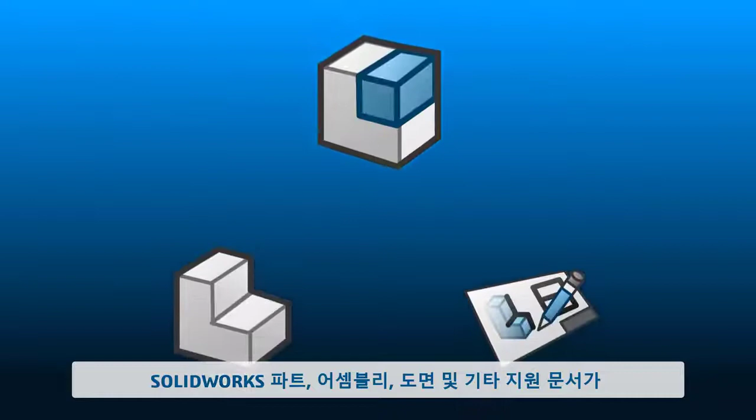Whether you work in a large organization or just a small team, no doubt you're concerned with storing, managing, and collaborating on your design data. And it's tricky, because SOLIDWORKS parts, assemblies, drawings, and other supporting documents are all linked. Consumer cloud storage apps don't know how to handle that. Maybe the investment in SOLIDWORKS PDM and Manage isn't right for you.

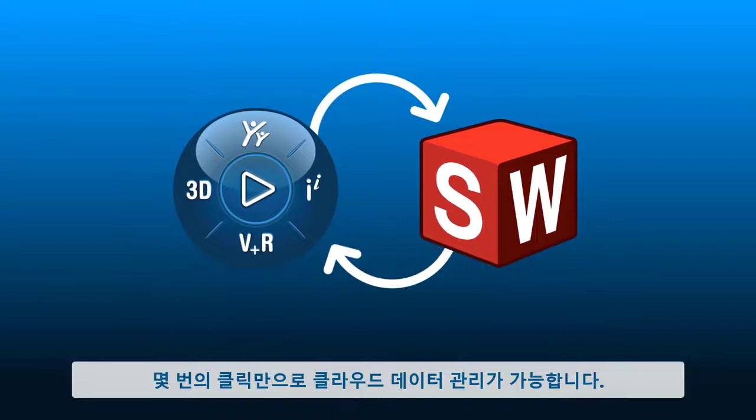There is another way. When you connect SOLIDWORKS to the 3D Experience platform, cloud data management is just a few clicks away. Eric Engineer and Debbie Designer are part of the team working on the Nemo submersible. They are on a tight deadline to finish up the hatch design.

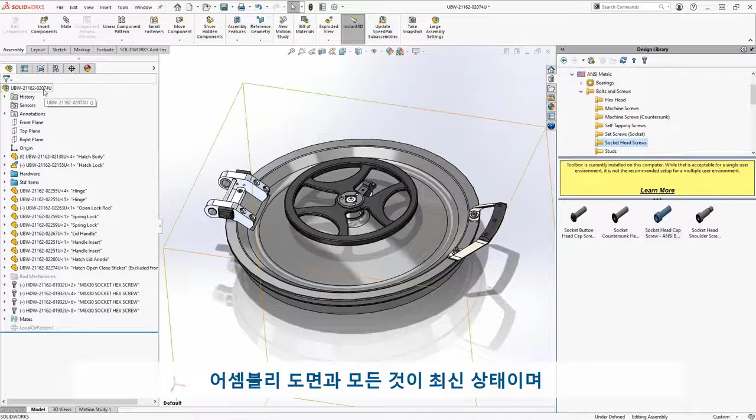Eric puts the finishing touches on the latch mount by inserting fasteners from SOLIDWORKS Toolbox. A quick check on the assembly drawing, and everything is up to date and ready to save to the cloud.

First, he logs into the 3D Experience platform, his team's secure connection to the cloud. Right from the task pane, he sees the status of his work. These indicators show which components need to be saved.

As for the hardware and other standard parts, SOLIDWORKS is configured to automatically catalog and release these items so all users can access their shared libraries online.

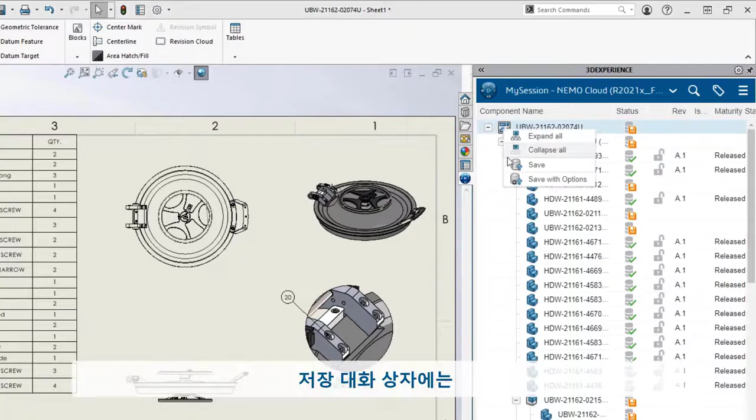The Save dialog shows exactly which items require an update. He can also assign any item to a bookmark, such as related drawing files. Out of a long list of components like this, bookmarks are a convenient way to flag them for easy access.

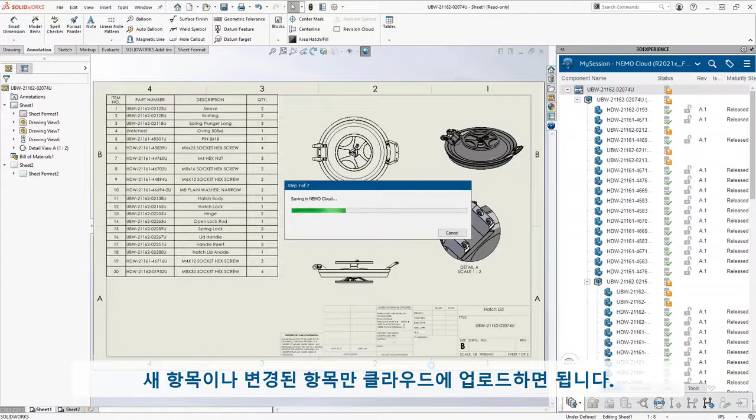Only the new or changed items need to be uploaded to the cloud. This makes efficient use of network bandwidth, but still ensures everything is up to date.

As the leader of his team, Eric is able to release his own designs. Easy-to-use lifecycle operations like this help the team avoid accidental overwrites.

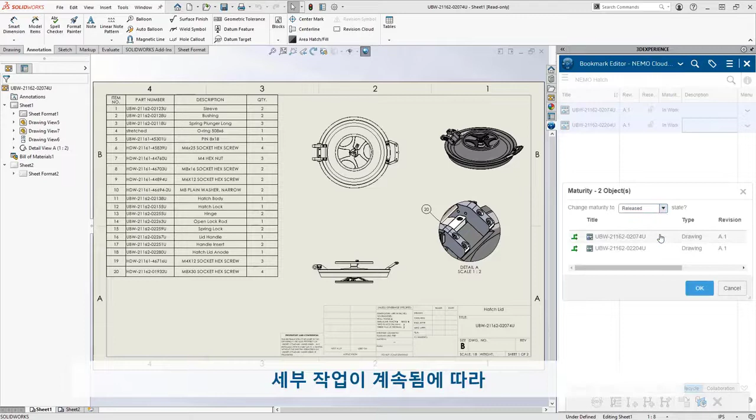Switching over to his Bookmarks tab, he sets the related part and assembly drawings to Released. It's just 2 drawings for now, but as the detailing work continues, the bookmark will keep everything organized for quick access.

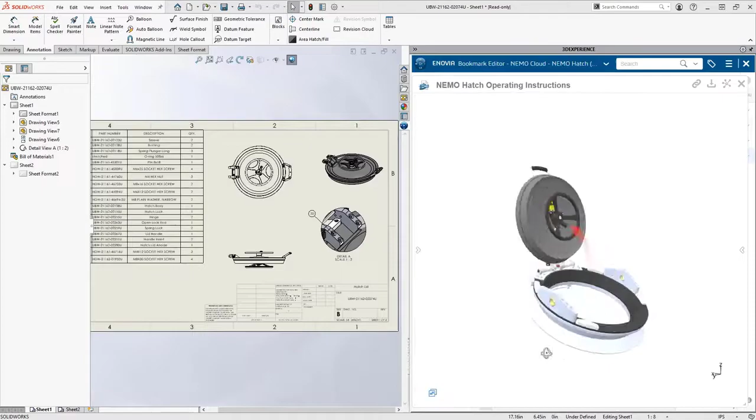Eric has a backlog of finished designs that also need uploaded to the cloud. He can automate this with a batch save. He just selects his local design folders and assigns them to the appropriate cloud space. SOLIDWORKS takes care of the rest.

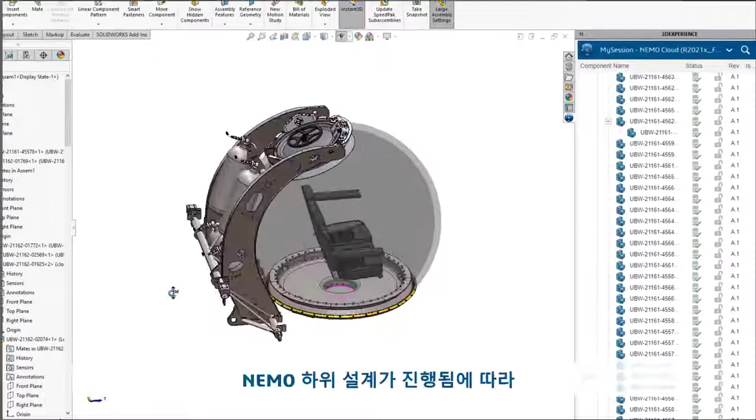As the Nemo sub-design evolves, the team must respond to change orders quickly. Debbie logs into her session and sees a message from Eric requesting a change. A quick keyword search shows several results. This one looks right.

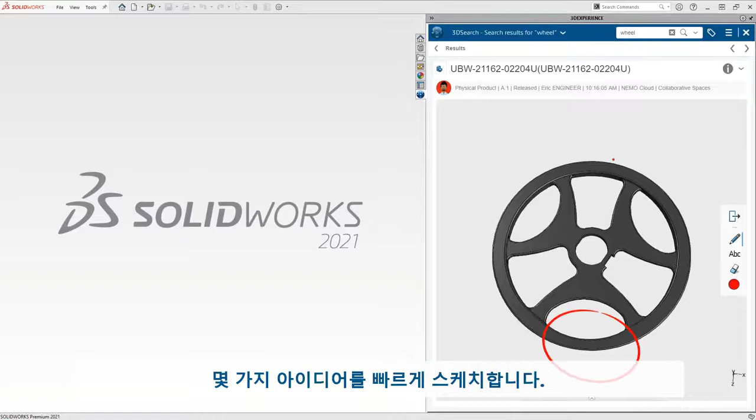Debbie uses the 3D annotation tools to quickly sketch out a couple ideas. From here, she opens the part in SOLIDWORKS. The latest version is automatically retrieved from the cloud.

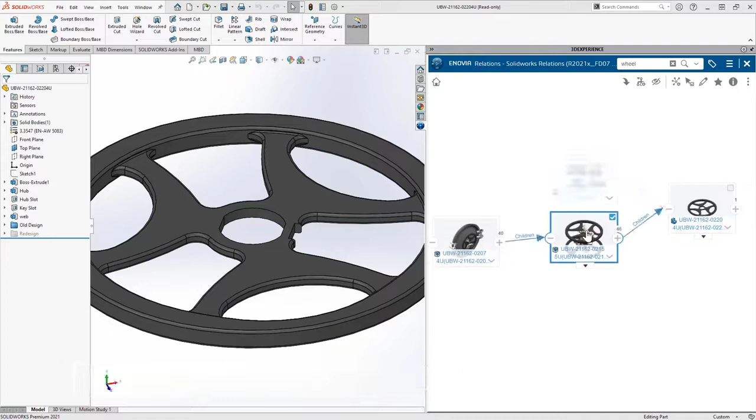Before she makes any changes, it's best to do a where-used search. The hand wheel is used in one subassembly below the master hatch assembly. She can open that right into her modeling session and get to work.

This version of the subassembly is released. In order to make changes, Debbie needs to create a revision of the assembly and the hand wheel. The status indicators immediately show that the current assembly structure is out of date.

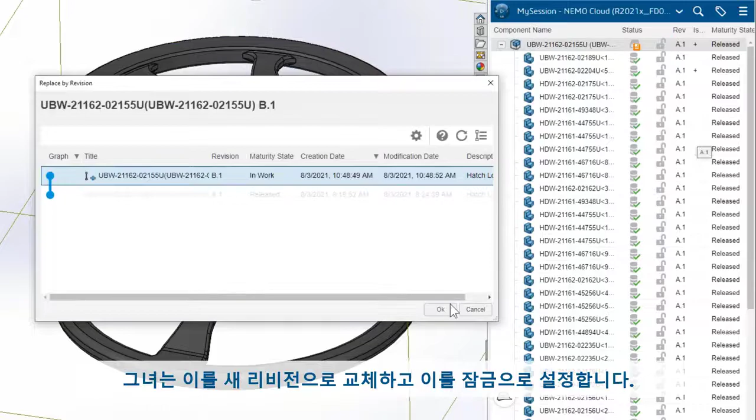So she replaces it with the new revisions and sets them to reserved. This gives her write access to the items she needs to modify without locking other users out of the rest of the assembly.

The redesigned hand wheel looks great, but she needs to update the drawing. The shared bookmarks give Debbie quick access to the related drawing files.

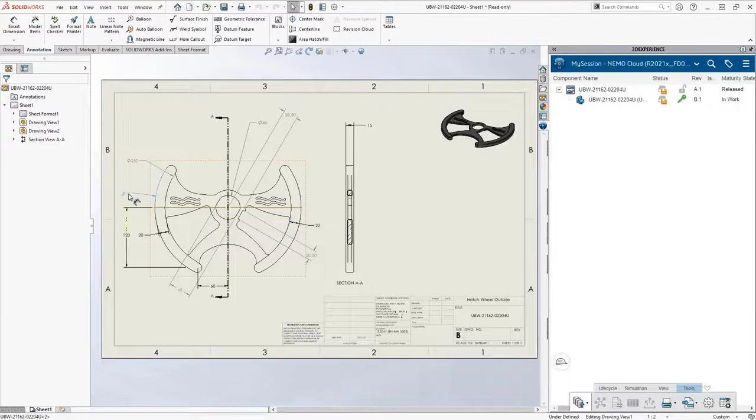The drawing is now in sync with the part model, so she saves it to Revision B, then sets the part and drawing to a frozen state so they can be reviewed.

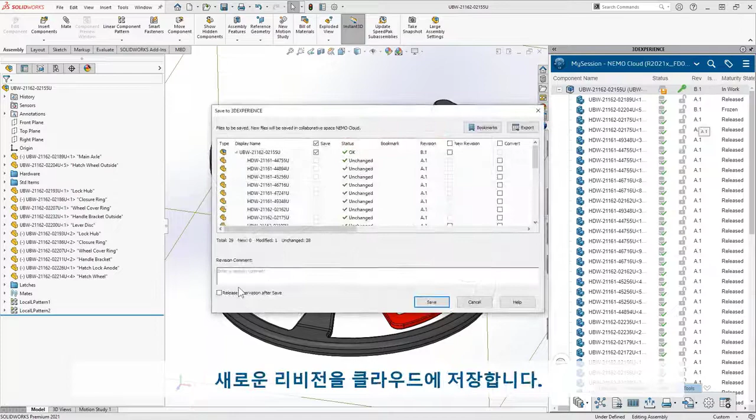Returning to the assembly, she finishes out the design by adding the latch mechanisms and saves the new revision back to the cloud.

In order to meet their tight deadline, the Nemo team often needs to work on the same design files at the same time. Eric is working on a new revision of the master hatch assembly.

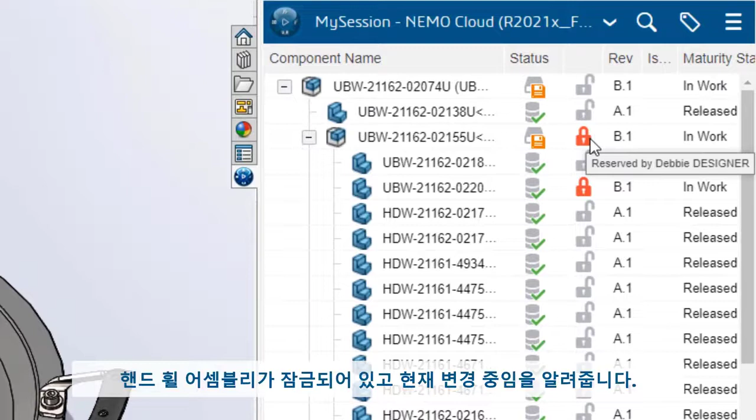These icons let him know Debbie has the hand wheel assembly reserved and is currently making changes. He can reserve the top-level assembly without affecting Debbie's work on the subassembly. This modular approach to access control allows users to design concurrently without accidentally saving over each other's progress.

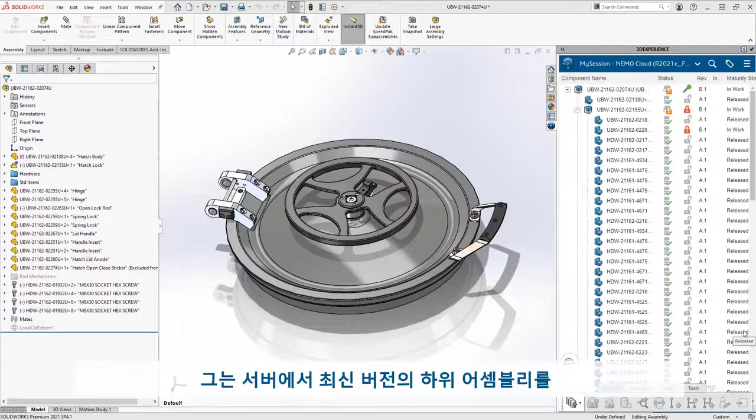A short time later, Eric sees that Debbie has finished up. He just needs to reload the latest version of the subassembly from the server. Taking a look at the handwheel drawing, he likes her redesign and moves it to released.

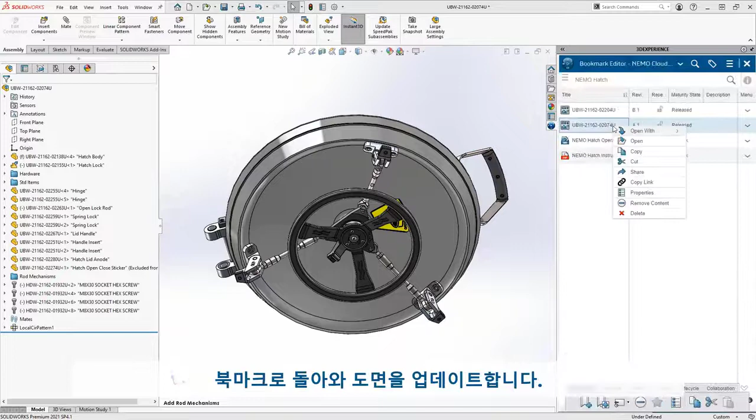Back in the assembly, Eric attaches the connecting rod mechanisms, then returns to his bookmarks to update the drawing. Bumping the assembly and drawing to revision B, he's ready to save.

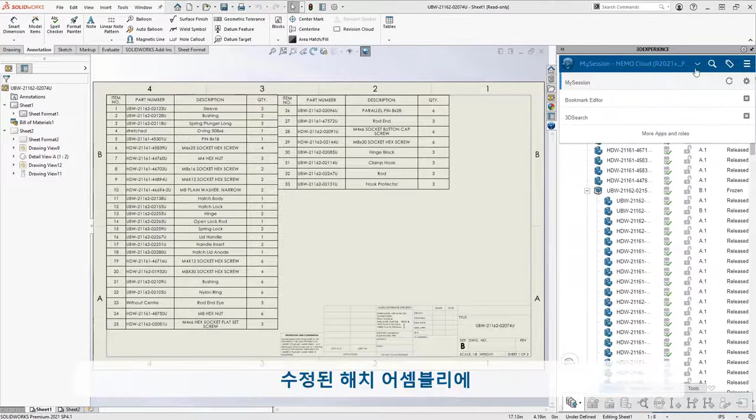The revised hatch assembly requires new versions of the supporting documents. From the convenience of his Bookmarks tab, Eric uploads the latest version of the Composer file and uses the interactive preview to inspect the latest revision.

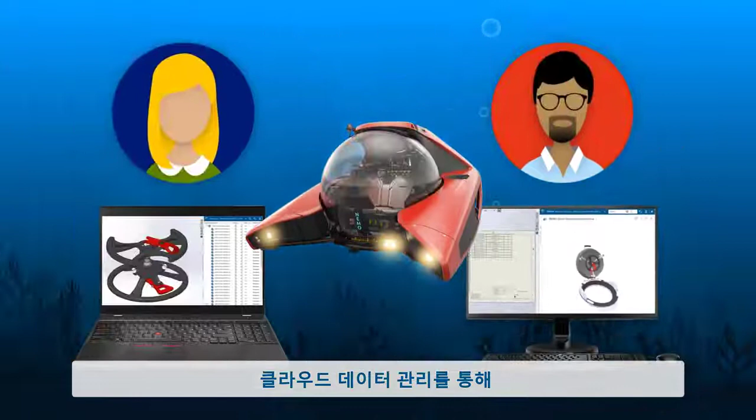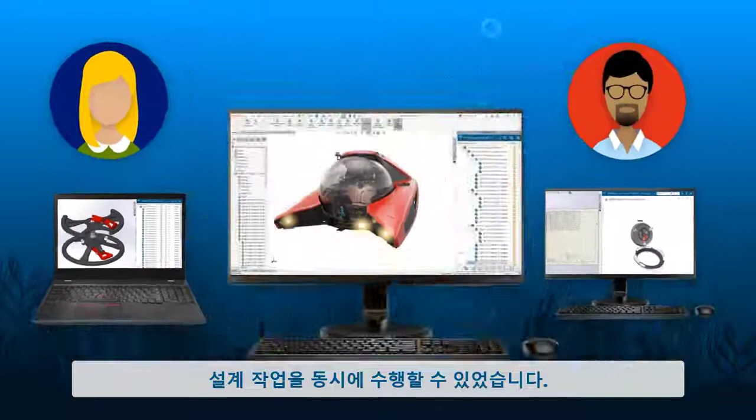Out-of-the-box cloud data management enabled the Nemo team to be productive right away. They were able to safely store their data, manage changes, and design concurrently, all without ever leaving their familiar SOLIDWORKS design environment. Everyone in the organization benefits when you connect SOLIDWORKS to the 3DEXPERIENCE platform.